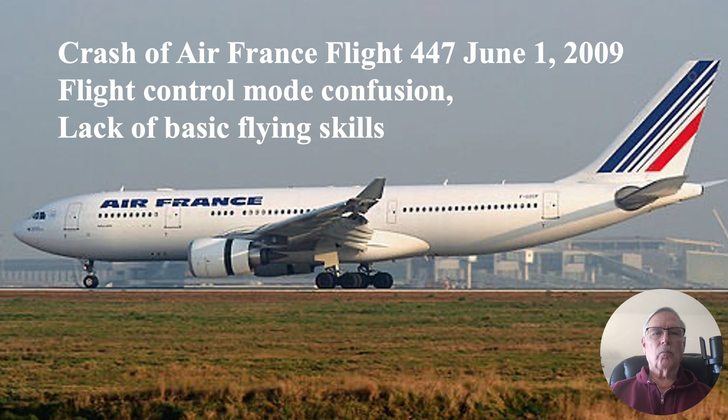Hi there, my name is Ron Rogers, and this presentation deals with the crash of Air France Flight 447. This was a flight from Rio de Janeiro, Brazil to Paris, France, and the crash occurred on 1 June 2009.

Now, this was a totally preventable crash, and I think most private pilots with less than 100 hours understand the concept of pitch and power, and they could have kept this aircraft out of trouble. And part of the issue here is just a lack of basic flying skills.

Now, when I was chairman of the ALPA National New Aircraft Evaluation Certification Committee, we went over and we flew all the Airbus aircraft, and we would get these marketing brochures, is probably the best way to describe them. They're not really technical brochures in the fact that they don't lay out all the specifics of the flight control,

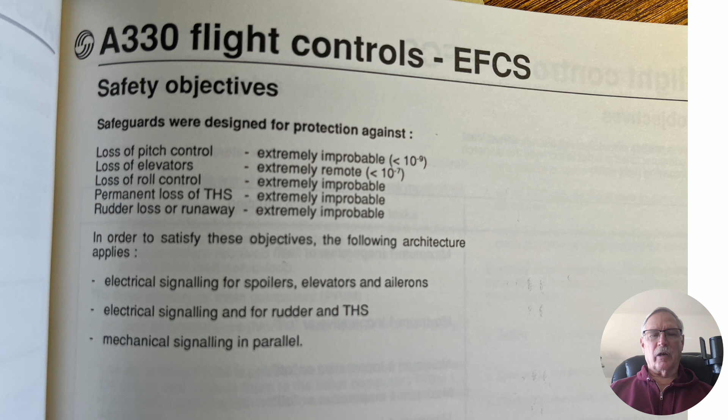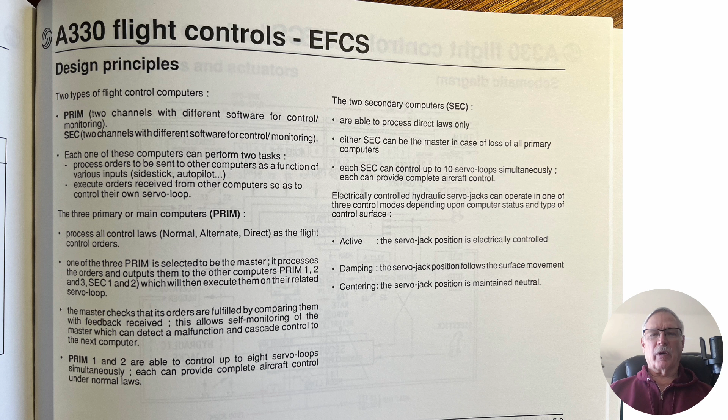but they put a marketing slant on it. And they talk about, yeah, you're just not going to lose pitch control. You're not going to lose the elevators. You know, the flight control computers do wonderful things. They're designed, you've got primary flight control computers, you've got secondary flight control computers, and they do all sorts of wonderful things for you. You've got all sorts of high angle attack protection, pitch protection, bank angle protection.

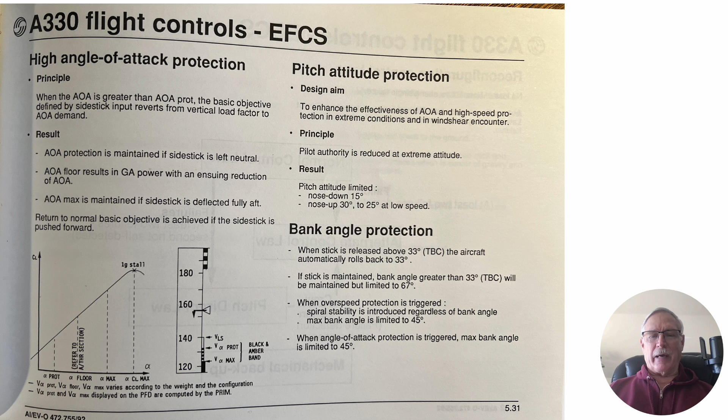Interesting thing about this, of course, there is no direct stick to elevator control, and the throttles are not directly to the engines, and they don't move. Moving auto throttles is another thing that I think is kind of nice to have, to see the thrust. With the setup in the Airbus, you can have the throttles at idle and go into alpha floor and have full power on the engine while the throttles are back at idle. You can have the throttles in the full, what would be full forward, and be at idle power because that's what the computer is commanding. Gets interesting, doesn't it?

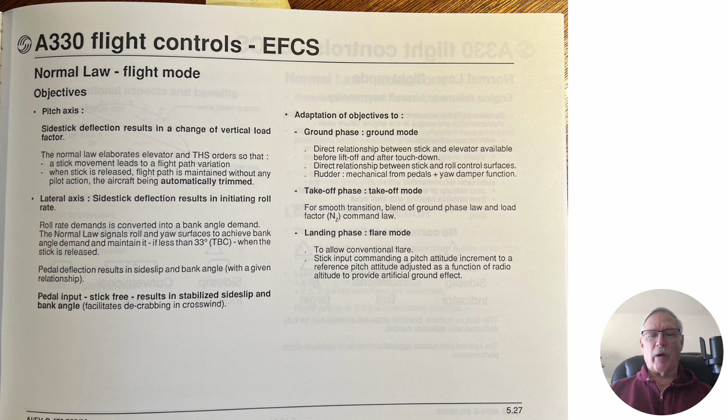So we talk about the normal law, which is where you usually are, and it does various things for you. It makes the airplane fly better. It enhances flight control. It prevents you from getting in trouble. And this is what Airbus was touting early on, was pilots just can't crash this airplane. We're building an uncrashable airplane. Of course, that's gone by the wayside so long ago. I think most people don't even remember what I would call their extreme excessive arrogance on claiming they had built an uncrashable airplane. And that was told to me directly by test pilots in the program.

So we got the normal laws, we got the protections. Here we have kind of a very extremely basic block diagram, and like it says, there's no direct relationship between side stick and control surface deflection.

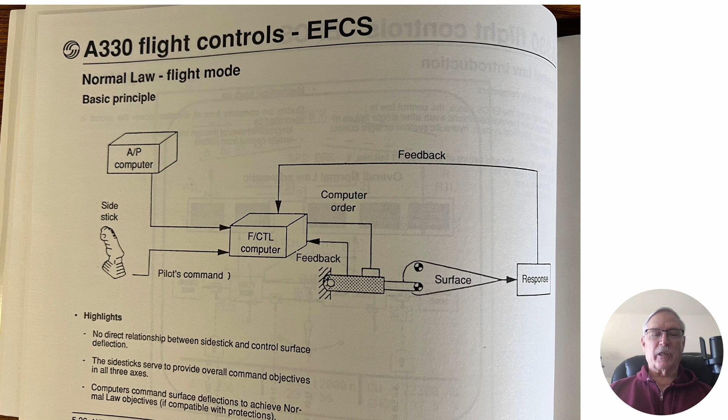And then we got the pitch controls. We got trim that goes back there mechanically. That's if you're in direct law. And you've got the autopilot, the stick there. The autopilot can command various actions. You have three primary flight computers, two secondary ones, and a little switch there going from normal to alternate law. And alternate law is the big bugaboo we're going to talk about.

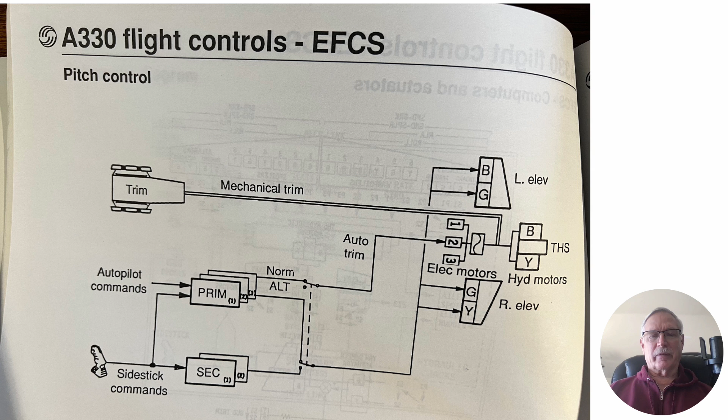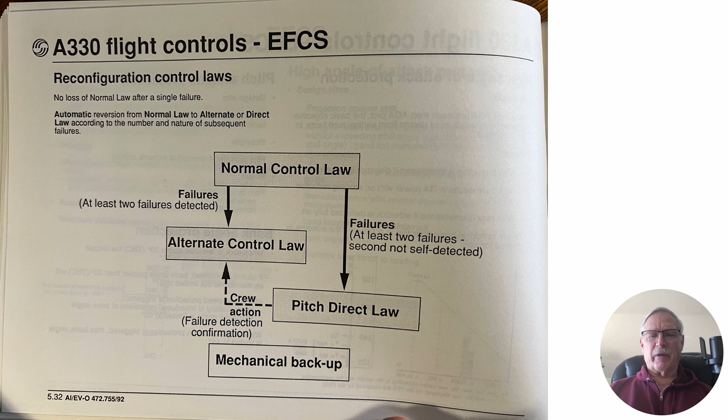All right, so normal law is where you normally are and everything's fine, everybody's happy. Getting to alternate law, you need a couple of failures. Well, that's kind of interesting. You know, you don't usually get a lot of failures. But if things do go wrong, the primary flight display kind of shows you. Instead of those little dashes up there in normal law, you can go to alternate law and you get the little X's. And based on experience, I'll tell you, those X's don't always get your attention.

Now, when you go to direct law and you get the use manual pitch trim, it doesn't say you're in direct law. It says use manual pitch trim because you have no trim in direct law.

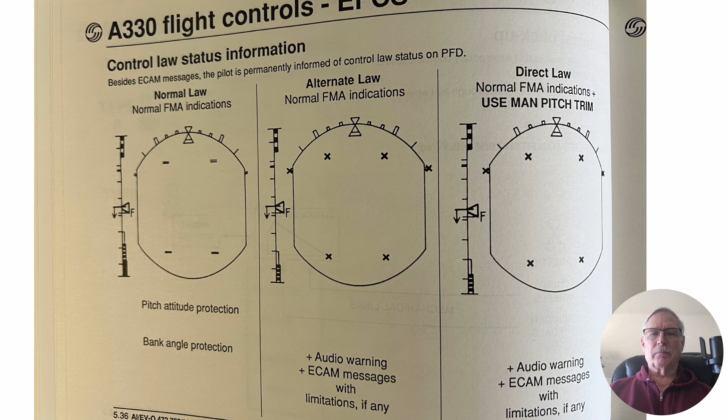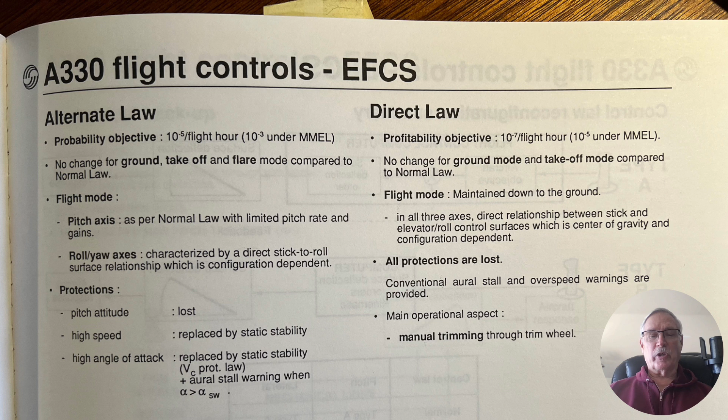So, okay, we're in alternate law. Yeah, that's just not going to happen. Everything pretty much works nicely, and protections, well, we lost pitch attitude, we lost the high speed, high angle of attack, well, we got static stability. Okay, that's what normal airplanes typically have. And direct law, it's pretty much manual. Now, the interesting thing in this marketing brochure is they didn't mention a very important fact.

And there's the red arrow. In alternate law, the airplane can be stalled. And actually, that's how we typically did stalls.

And the funny thing was, when I went to Airbus captain training, they said, 'Well, how do you get into alternate law?' And I said, 'Well, what I usually do is I ask Fernando, the flight test engineer, to put us into alternate law or direct law, which is how we did on the flight test aircraft. He's back there in the flight test station, and he can do it.'

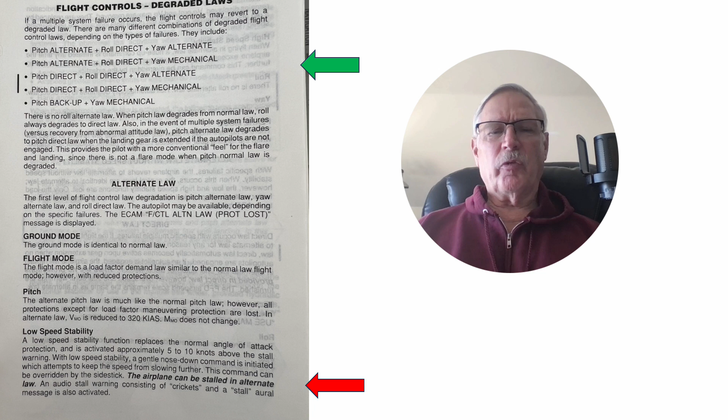But up there in the green arrow, you can see you've got all sorts of combinations of these laws, depending on what may be going well and what may not be going well, and it can be very confusing.

So it was a dark and stormy night over the Atlantic there, and they're heading on, and they were getting into icing conditions. Now, pitot tubes are heated, and they're supposed to take care of this, but they were having some problem with these pitot tubes, and they went through several iterations of design, and they were doing a lot of replacements.

And that little history gets kind of complicated. But basically, the pitot tubes were having a problem on the Airbus aircraft, and of course, the pitot tube is your airspeed sensor. Now you've got several things that kind of help you out on airspeed.

You've got three systems: a left, a right, and a standby. And apparently they were getting enough icing that it took out enough of these systems, maybe even all three, because they were getting very erroneous airspeed indications.

But you still have the angle of attack indicator, and that should really help you out, right? The flight test Airbus aircraft I flew had a nice little angle of attack indicator down on the left instrument panel there, so you could sit there and look at your angle of attack. Well, that was kind of an extra, and I never saw it outside of flight test.

My airline decided we're not paying for that. So the pilots had no direct indication of angle of attack, and these pilots also had no direct indication of angle of attack. And one thing's interesting, this was a very new Airbus A330 that Air France had. In fact, it was the newest A330 they owned at that time.

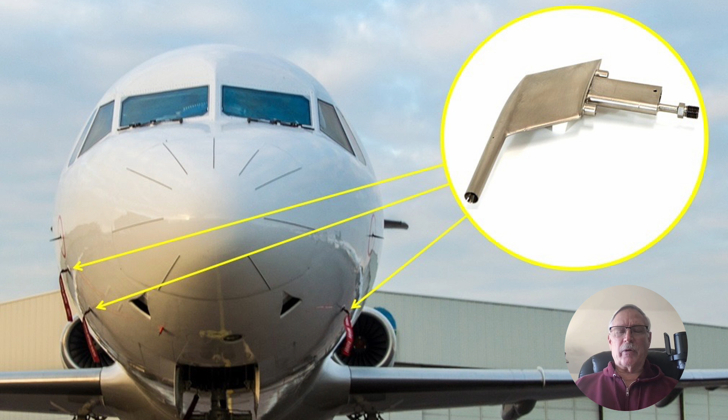Now, shortly before the crash, approximately 4 minutes or so, they got into the airspeed indication problems. And the nice thing about the Airbus flight control system is it goes, 'We don't like this, we've got indications that don't make a lot of sense.' So the autopilot disengages, the auto thrust disengages, and the airplane basically says, 'You've got it.'

Well, this startled the two co-pilots that were up there. It also puts it into alternate law — they take you out of normal law because the airplane kind of doesn't know what's going on. And what happened was the pilot on the right side, who was designated as the pilot flying, grabbed the controls.

And one interesting thing about the control laws is you're limited. The stick in roll commands 15 degrees per second roll rate. Now, when you go into alternate law, the airplane has a natural roll rate of 20 degrees per second, and it's very sharp — I've flown this in flight test — it's a very sharp leading into the roll.

You start it, and it's very crisp. It's almost like an F-104 that has a very crisp initial roll rate. And it can be a little bit unnerving because you just barely move the stick, and the thing really goes on you. In fact, they used to have the roll rate at 20 degrees per second.

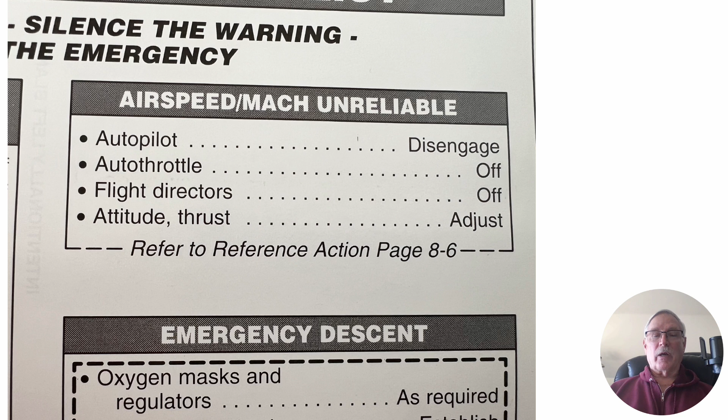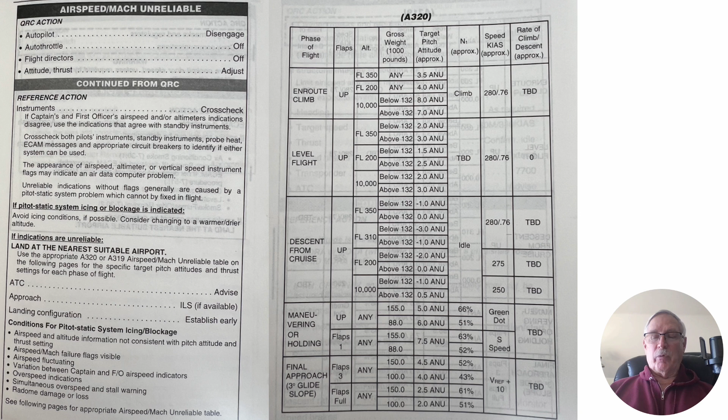There is a procedure for airspeed/Mach unreliable, and this is an emergency procedure. It basically says the system will disconnect itself, but just to ensure it: disengage the autopilot, disengage the auto throttles, turn the flight directors off because they can just be confusing, and then adjust attitude and thrust. That refers you to the immediate action, QRC, quick reference checklist. Then it takes you to the reference action, and basically it says, hey, this is where you are, this is where you put the nose, play with the power, and this is basically what it'll give you. And if they would have done that, there would not have been people hauling pieces of the aircraft out of the ocean.

Now, a lot of things came out in the final report. They're talking about inconsistencies of the airspeed, the crew's lack of practical training in manually handling the aircraft, both at high altitude and during events of abnormality of airspeed indication. The cockpit's lack of a clear display of the inconsistencies in airspeed readings identified by the flight computers. So it wasn't really terribly obvious that they had not a good situation, and they faulted the crew's lack of response to the stall warning, whether due to a failure to identify the aural warnings or to the transient stall warnings that could have been considered spurious.

And one of the things about this was, you can get high-speed buffet and low-speed buffet. And of course people who have flown the U-2 know that those can be 2 knots apart at times. You can actually, in a turn, have the outside wing in Mach buffet and the inside wing in stall buffet. But, as usual, I digress.

But anyway, part of this whole thing was it was very confusing, and they had a lot of alarms going off in the cockpit. There was a lot of confusion. And when the AOA system went to extreme values, it just dropped out of the whole picture and said, 'hey, we don't know what's going on, you got it.' And of course, that's when pitch and power should have helped him out in this.